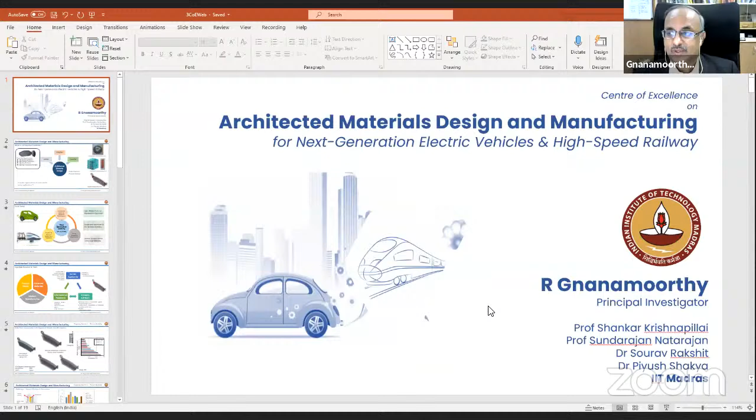I'll give a brief about the research activities happening in this Center of Excellence on Architected Materials Design and Manufacturing, with a target towards next generation electric vehicles and high-speed railway.

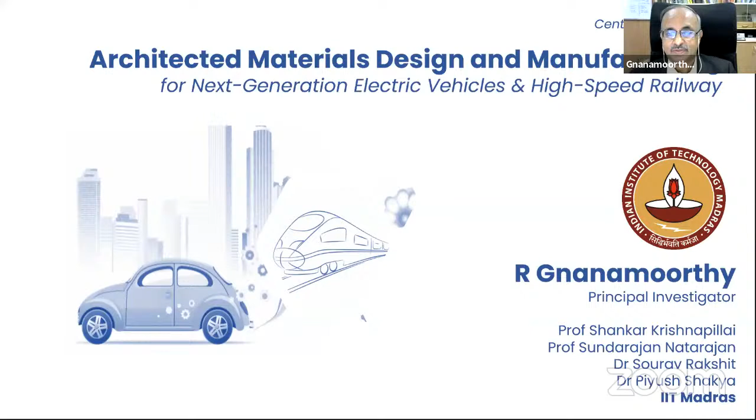Myself, Gnanamoorthy, is the principal investigator, and we have Professor Shankar Krishnapillai, Professor Sundarajan Natarajan, Dr. Sourav Rakshit, Dr. Piyush Shakya, all colleagues of mine working in the machine design section of IIT Madras.

I'll give a very short brief about what architected materials is, because the terminology may be new for some of you. I'll start with a simple example, a well-known application: a brake pad. Most of you might be very familiar with this.

If you look into the requirements for this product, it's very complicated, not like other products. The material should have a very good coefficient of friction, very high thermal conductivity, very good wear resistance, and very good high temperature strength.

If you look into these requirements, it's impossible to have one single material which satisfies all of them. Some materials have very good friction coefficient, but the same material may not have good high temperature strength. So what's done so far is to use different proprietary combinations developed by leading industries. Some combinations are excellent for road, and some are very good for rail applications.

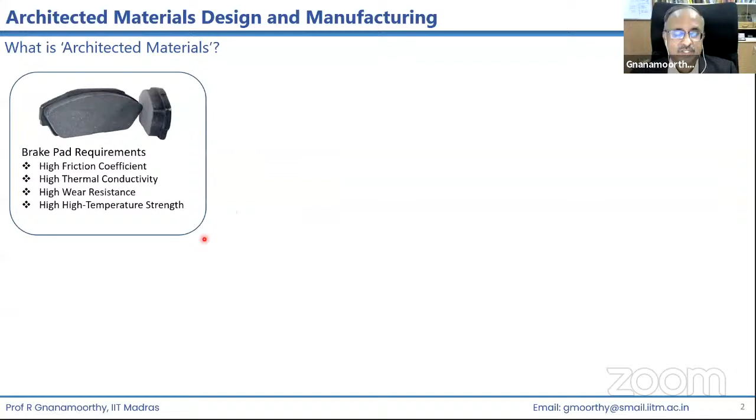And it is always a composite, needless to say. We have metal matrix composite based brake pads, ceramic composite based brake pads, and polymer matrix composite based brake pads also - all composites. We mix nearly 10 to 15 ingredients to meet these requirements, and it is homogeneously distributed in the material. In this architected material approach, we should not get confused with composites, which we are very widely using.

Here we try to selectively reinforce for the requirements expected in an application, because metal has its own capabilities - easy to deform, can absorb a lot of energy, a good thermal conductor. Polymers are light in weight with good friction capabilities. Ceramics have excellent high temperature strength. All these are entirely different classes of materials.

Most of you are engineers and very familiar that the processing capabilities and functional requirements of all these materials are entirely different. Now we are trying to see how best we can bring these different materials together at a macro level in a product, so that the best properties of each are effectively utilized in the component.

We are not getting into composites - we are getting into macro reinforcements, selectively placed in the product depending upon its requirements, so that we get the best of everything in a single product. This is the area we started working in around 2006 onwards.

Most of you know the functional requirements needed at the tooth are quite different from what's needed in the hub region. We need a high strength material in the load transmission portions, but not that much is needed when we want to achieve the required dimensions.

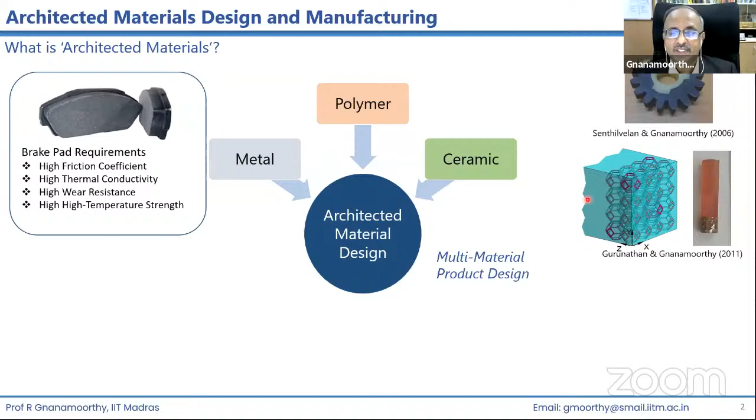So we started investigating using the injection molding process to develop very different types of materials in a single product. Then subsequently, we started research into network-based composites, where we take a metal foam and fill it with a suitable resin depending upon the functional requirements, then try to understand how these composites behave under certain functional requirements.

And in this example, as I mentioned, we also did research work on brake pad performance. We've done a lot of numerical studies to effectively reinforce with different classes of material for certain functions, which I will brief in subsequent slides.

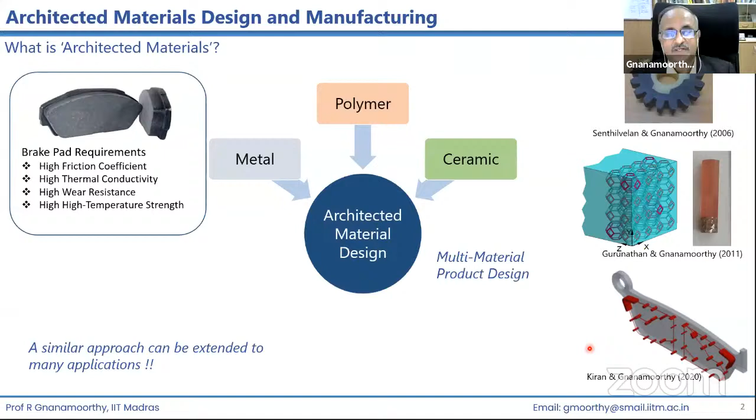Okay, so the architected material approach is macro reinforcement to get the selective properties in the selective region. Although I have just shown certain examples here, this can be applied to any applications, depending upon the functional requirement, depending upon the need of the material to satisfy the overall performance in a certain period of the life cycle of this component.

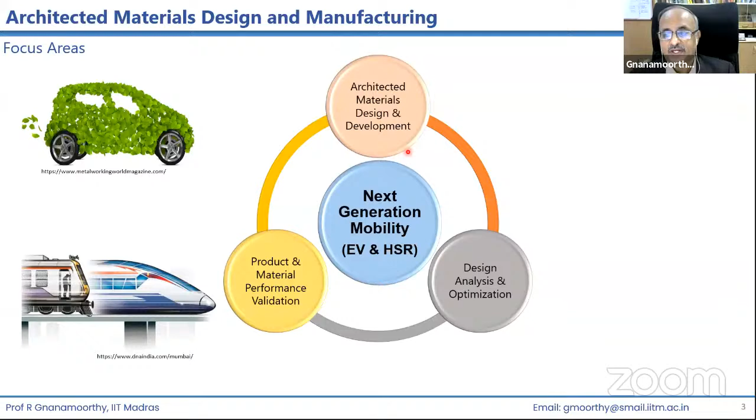We need to do these reinforcements accordingly. What we focus on in our group is architected materials design and development as one key area. We need to understand what kind of products require what kind of functional requirements as an individual product. Our team members are very good with numerical tools and design optimization to properly select the reinforcements to do the effective function.

And we also look into developing some simulated products. Sometimes it will be difficult to develop a very big size product and do the validation, so we like to do it in academia, whatever way is possible. Although this can be applied to multiple domains, now we like to focus on two critical areas which are of importance for Indian society.

Electric cars and then the high-speed rail. And our focus also is on making the components lightweight. In the mobility sector, whatever you want to improve, lightweight is always the first requirement.

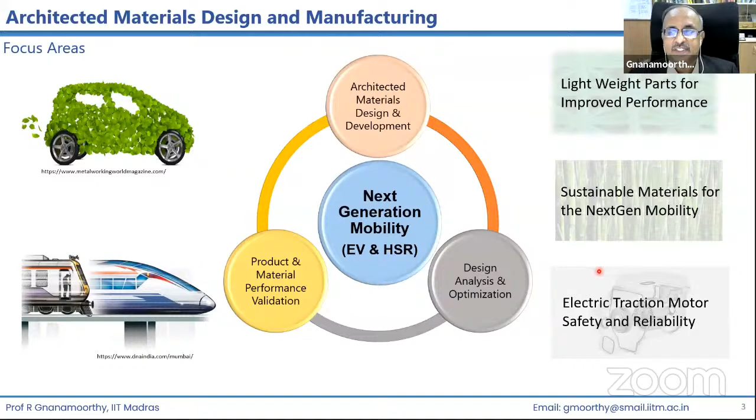And then sustainability. It's going to be very important for the automotive sector because we need to reduce the carbon footprint, and how to use natural materials in the next generation mobility. We also try to investigate some specific issues associated with electric vehicle traction motors, which is a key component in these applications.

So what is needed to pursue research in this domain? It is translation research, as most of you can understand. We need to have good knowledge of the product design. We need to understand how the brake pad is designed, or how every component is designed. A sound mechanical engineering knowledge is needed.

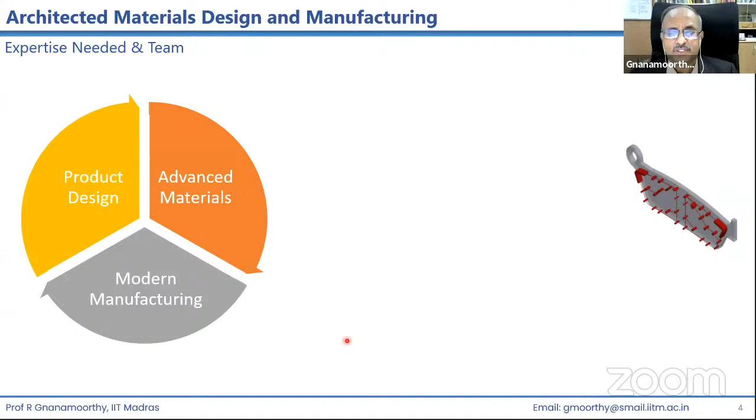Then accordingly, we need to have the selection of materials. Now it is a choice of thousands of materials available, and we need to select the best ones. Then good information about the manufacturability of the materials is needed. So to carry out research in this domain, we need experts who are good in design with equally good knowledge in materials and manufacturing.

Otherwise, a real product will not come out. So the current members, as you can see on the website, we have experts in these domains: design optimization, numerical analysis, and reliability studies. We collaborate with our colleagues who are close to Chennai.

Then the international associations currently involved are with the Nagaoka University of Technology and Kindai University, which is ongoing, and we are open for many more international collaborations and reputed collaborations within India too. And needless to say, this requires a lot of expertise and experts like our moderator and others.

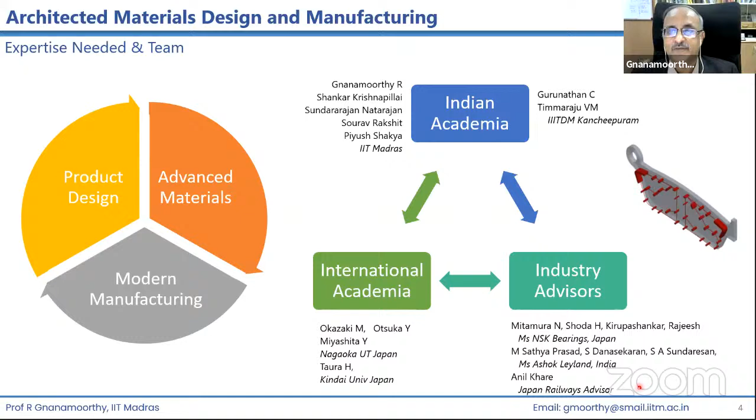Experiences are extremely important, so we have good association with NSK Bearings Japan. They give their practical problems, what kind of solutions are needed, what are challenging kinds of things, and advice from Dr. Sathya Prasad and his team. Then an associate from Japan Railways, a consultant, is also helping us identify certain components which the team will look into as part of the research.

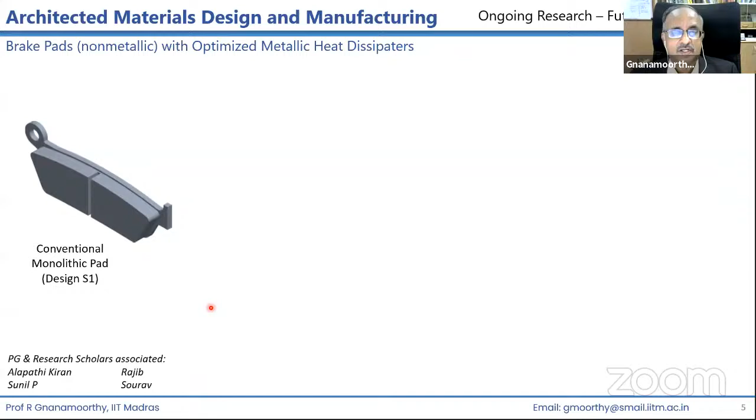I'll just brief about some of the ongoing research activities to give a glimpse about what is happening here. This work is done by some of the postgraduate and PhD scholars, who are acknowledged here. And this is a conventional brake pad. I think most of you are familiar. We just do, in one slide I am briefing, plenty of work is done, and you can see some of them are already published.

We try to look into one important aspect of how best we can dissipate the heat. Now the demands are very high. We always want to fly fast, we want to run, drive fast. So the brake has to absorb a lot of energy, and it has to dissipate it.

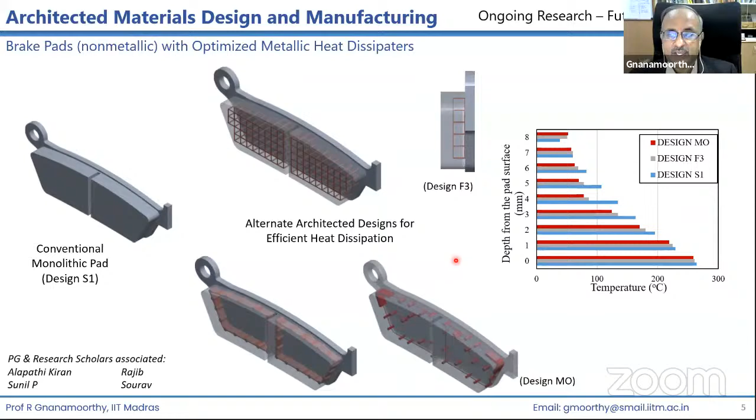And we don't want to change the brake pads every 2-3 years. We want to have it as long as possible. So one of the critical elements, we try to look into different possibilities of having metallic heat dissipation units, did some numerical simulations and arrived at places where heat is going to get generated, modeled it, optimized it, and then we try to understand it using numerical tools and optimization tools, and find out the best metal insert which will not influence my friction characteristics.

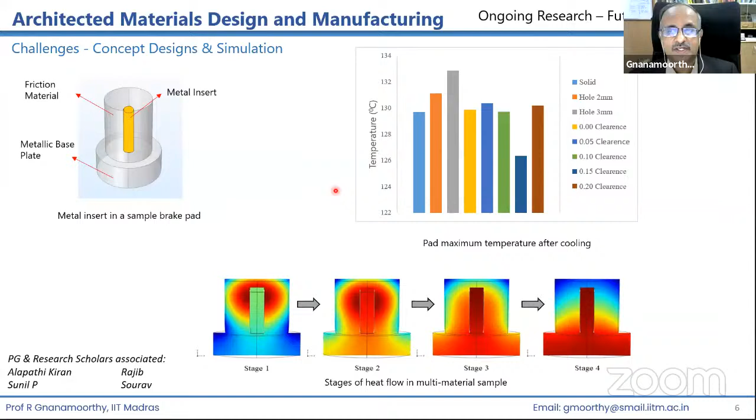Another area which is ongoing and close to this topic is traction motor bearings in electric vehicles, and also in high-speed railways. Probably some of you may think why I am choosing these two domains. Both are run by different types of electric motors, so that is the reason I have given this topic.

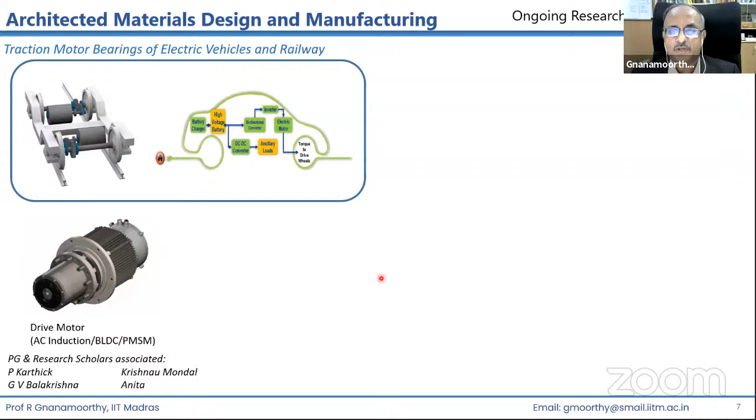Future mobility means we need lightweight structures, and in this new sector our drive is going to be mostly some type of drive motor, depending upon the brand. They have different types, and one of the critical elements in the drive motor is the bearings. If the bearing is damaged, it creates a lot of noise sometimes, and the vehicle itself will not move. So one of the critical elements is the bearings.

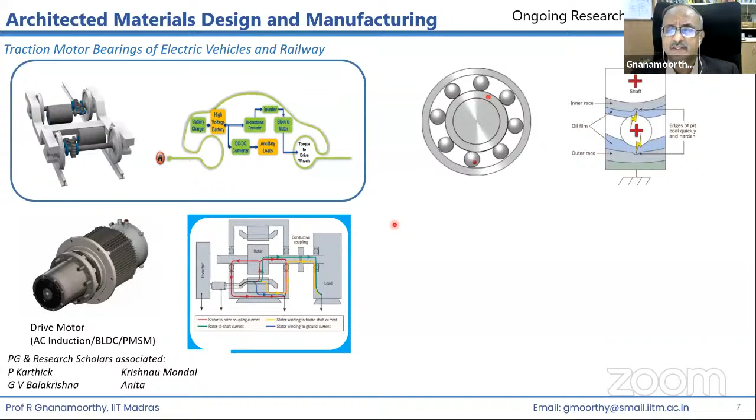We have a lot of bearings in conventional IC engine driven automotives also. But if you look into that, the sound generated and noise levels in other parts are very high, so the bearing noise becomes negligible. But when it comes to electric vehicles, we know that IC engines are not there, and any small sound generated from very minute damage in the bearing becomes noticeable.

So now our group is also trying to understand when current flows in the bearing, what is going to happen, what will happen to the reliability, damages, and subsequently the noise generated. We try to understand the contact characteristics, because the bearing is a very critical element. It has all kinds of motions, including contact fatigue.

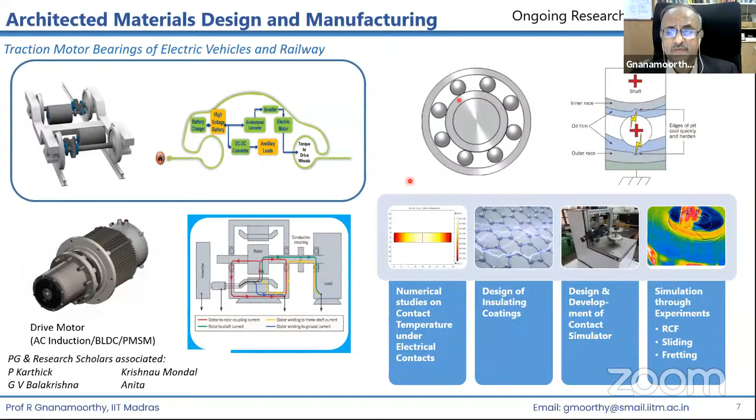There is simple sliding in some parts, fretting in some parts, and all kinds of relative motion taking place. It runs at very high speeds, and it is a critical element—if the bearing fails, the whole vehicle is down. So now we try to understand the reliability of these bearing materials under combined mechanical and electrical loads, which is expected in the drive motor.

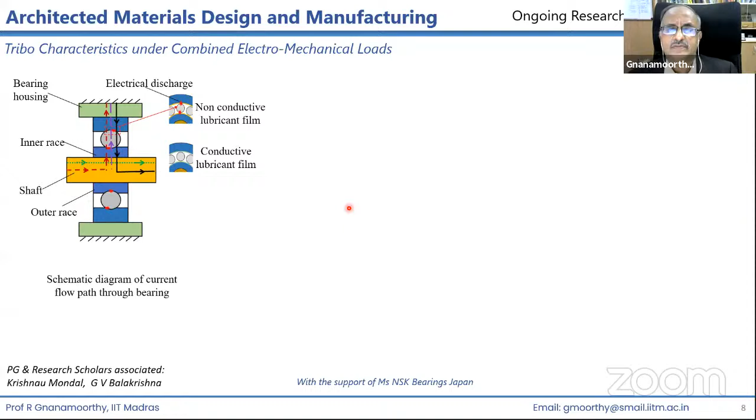As I mentioned, different types of current flow depending upon the drive motor and its control units, and the most critical thing is the lubricant in the bearing. This can get damaged, or it will not perform its intended function. So we'd like to understand—not the complete bearing, of course—what is going to happen in these kinds of contacts under combined electromechanical load.

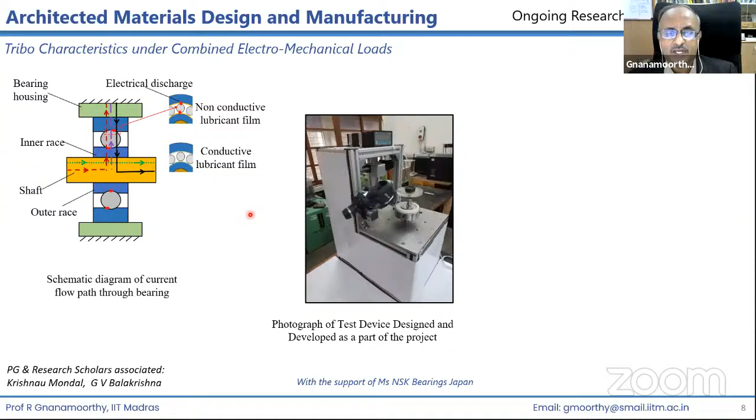This is part of the work of one of my MS research scholars, who has studied different electrical loads, and you could understand even in a very short time—this is not complete bearing testing, it is a simulated condition under the worst operating conditions—that the coefficient of friction increases even in a very short duration of about 1,000 meters or so.

Now imagine using these bearings for many years and thousands of kilometers—you can anticipate how fast you can expect failures, if it were pure sliding, but it's not going to be that. This research is being done under accelerated conditions.

The contact temperature rise in a very short duration is significantly high, and this results in damage to the lubricant—the lubricant will lose its function. A lot of research is being done in leading industries on developing different material combinations that will withstand this electromechanical loading, and lubricant research is also being done to create lubricants that will survive for a longer duration.

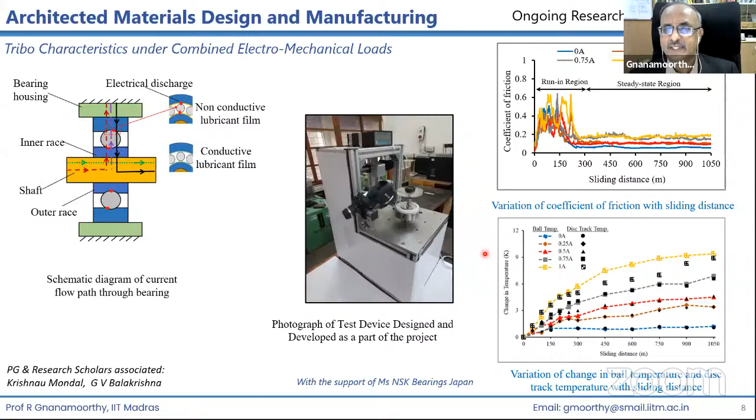One way to prevent this is through multiple attempts, done by electrical engineers, mechanical engineers and other sets of people, to make sure current is not flowing through these bearings. One attempt is to give a coating, which is also attempted by leading bearing manufacturers.

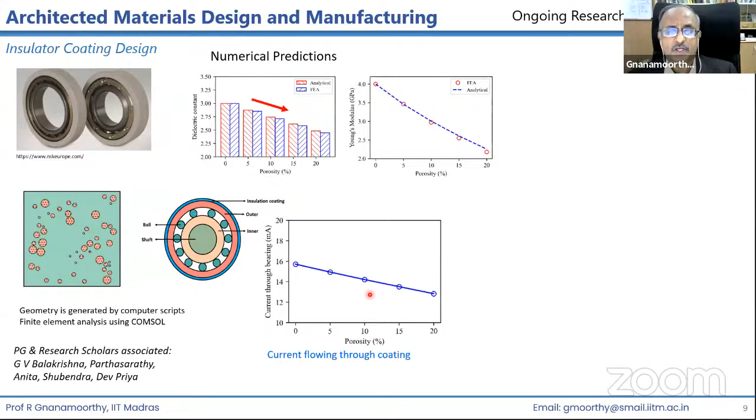We try to understand this numerically right now, and then develop something in due course — what are all the parameters which will influence the insulation characteristics of the bearing.

So now we try to model with different kinds of combinations — is it a pure numerical solution? Then try to understand what kind of porosity levels will be much better, both from the insulation requirements and also from the mechanical strength. It is not only the insulation requirement; mechanical strength is extremely important.

We did a lot of numerical work on different levels of modeling different pores, trying to understand how these things influence the coating made with different porosity gradients, or how we can make it with different kinds of architected coatings to ensure the multiple requirements of electrical insulation and mechanical reliability are achieved. This is the type of work we are also doing in this center of excellence.

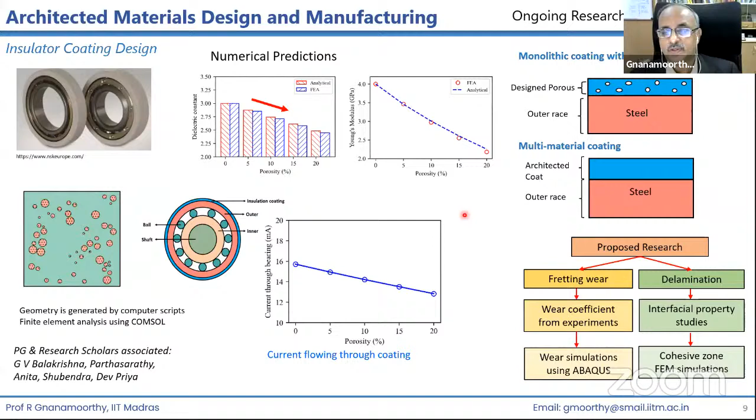So we wish to study the different contact characteristics expected here under sliding, rolling-sliding, and in the case of fretting — trying to understand both numerically and experimentally what type of coatings will be preferred for these applications.

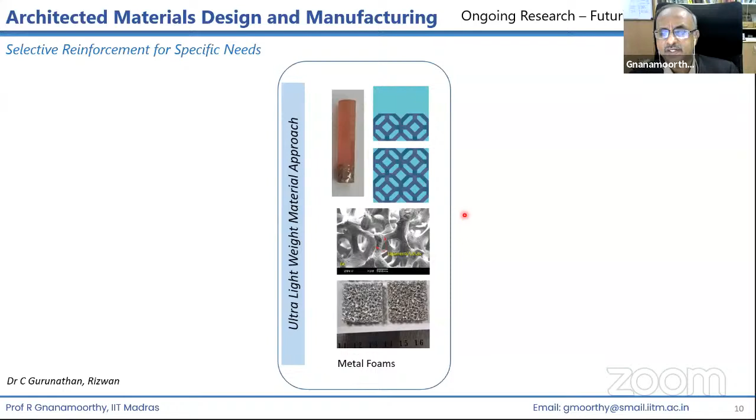This is another topic — selective reinforcement is the terminology we use here. One of our scholars has completed a doctorate in this domain. So the focus is on how to effectively and selectively reinforce to cater to certain requirements.

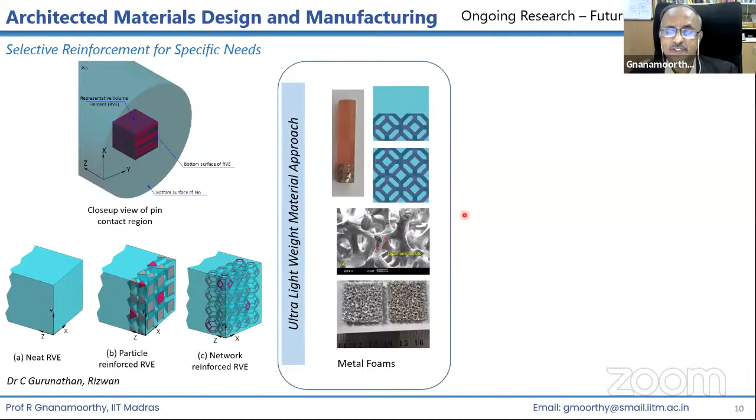We try to study how these metallic foams, when reinforced in certain places wherever you want to dissipate heat, perform best. We did both experimental and numerical work, and observed that significant heat dissipation happens when you reinforce it with a metallic foam compared with particle reinforcement.

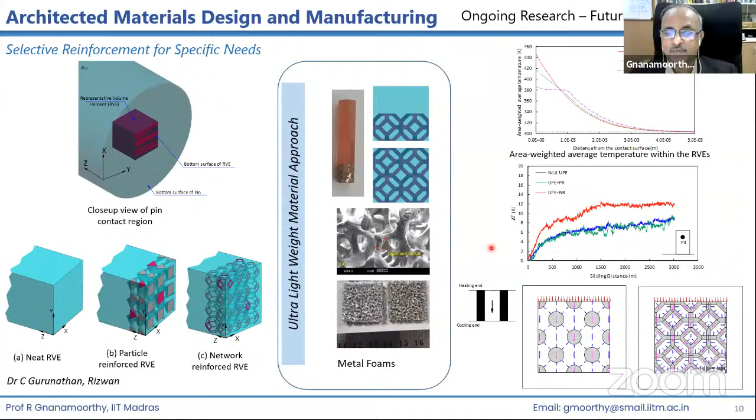This is a type of work from this aspect. Of course, we can do this kind of reinforcement for different functional requirements so that the best of the class of materials is achieved.

We are also working on hydrogen cars — it is a proton exchange membrane fuel cell, PEMFC. In this case, we are mostly looking into the mechanical aspects; we are not working on the chemical and other aspects.

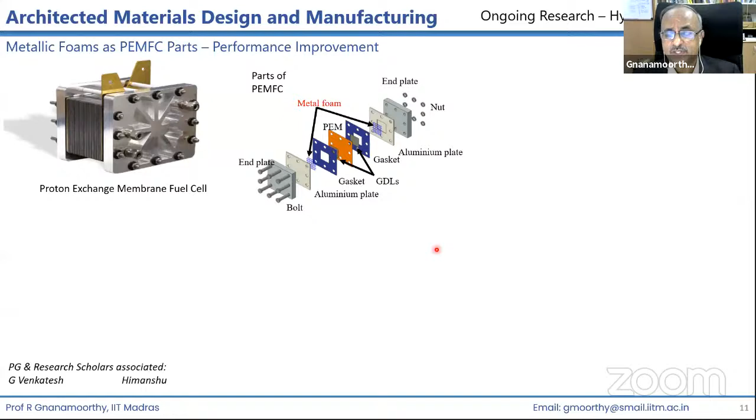Once the component is made and put into service, what is going to happen? What happens if it runs for a few years — will the intended functions be lost or not? One of the key components here are shown, and these components are normally made with graphite plates.

Now we are trying to look into alternatives to graphite plates, and a group of people are working with different kinds of metallic foams. It's an active area of research with a lot of work being done by various groups.

We try to understand if a metallic foam is used — this is nickel metallic foam — in the fuel cell, how long it will do its job. So we do some numerical studies to understand what kind of relative motions are going to happen due to vehicular vibrations.

Imagine you are not always riding on smooth roads — there will be ups and downs. With these things, what is going to happen to reliability? So we model these foams numerically and try to understand what kind of relative displacement is going to happen between the foams and the other materials.

Just imagine if these things run for a few years, you're going to have a problem with the performance of the associated components. So we try to simulate the contacts using simulated experiments — micro contact simulators — to find out what kind of debris are going to get generated, the approximate size of the debris, how it's going to contaminate, and how this contamination is going to influence the performance of the fuel cell.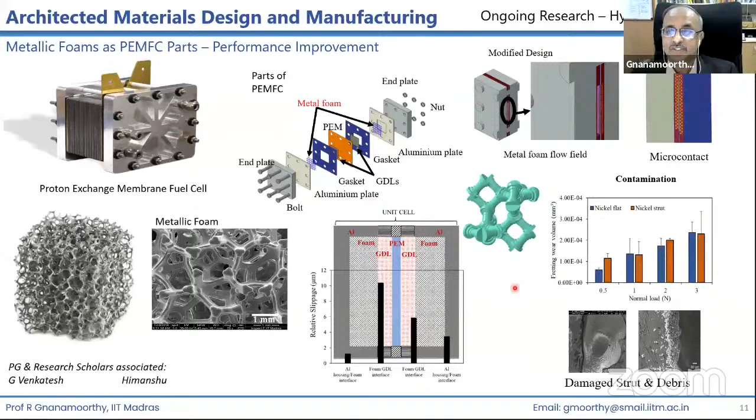A few research scholars are working to find out how this metallic foam changes its characteristics with the clamping load and operational characteristics, and how it can be modified by selectively redesigning the foam so that you get the best result after clamping and during service. This is research work in progress, and now sustainability is a very important aspect.

The whole world is looking for alternative materials which are decomposable and environmentally friendly. So instead of looking into synthetic materials and polymers, why don't we try to look into natural materials?

In South India, there is plenty of coconut usage, and tons of material are disposed of as waste, mostly going into landfills. It forms huge hills in certain parts of Tamil Nadu, and also in Sri Lanka. From these shells, which are currently not well utilized, we get two important byproducts from this waste: one is fiber, another is pith.

So how effectively can we convert these natural materials? Plenty of research is done on natural fibers like jute, banana, sisal and bamboo for developing polymer composites with synthetic resins, and people have studied their performance.

But we are trying to look into product-centric translational research—how best we can use our architected design compass concept in product development, and then use natural materials so that sustainability is achieved.

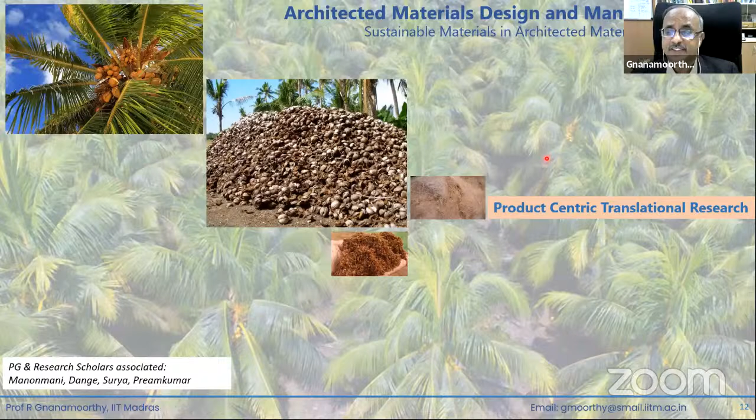We are looking for applications in these domains because this is one of the important areas where significant CO2 emission is still happening, and this research is focused towards that. Right now, only limited research is done in automotive, and we would like to collaborate with leading automakers so we can focus on development of their products.

Our association is strong with these 4 universities currently. We have decades of experience collaborating with Nagaoka University of Technology, with joint supervisions, joint student exchange programs, and other activities very actively going on for the last 2-3 decades.

Now, with more possibilities of collaboration, we would like to enhance it with Nagaoka University and different universities all over the world. We are also getting associated with Kindai University, and then IIIT Kancheepuram. We get a lot of advice and support from automakers.

One is NSK Bearings, and then the group of researchers from Ashok Leyland—they try to advise us on what direction we should take. We are also interested, and soon we'll have more collaboration with people from the National Taiwan Ocean University and others.

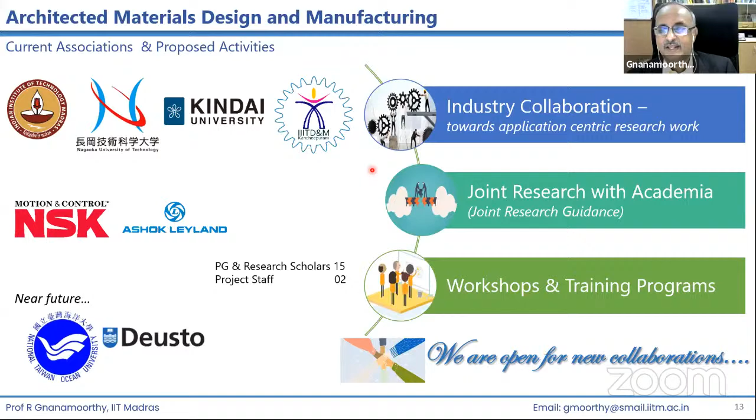Currently, more than 15 research scholars and postgraduate scholars are associated in different activities. I have just shown certain things in 1 or 2 slides, but each area is discussed for hours. We also have 2-3 staff members working on this topic, so this is the core team—we have Dr.

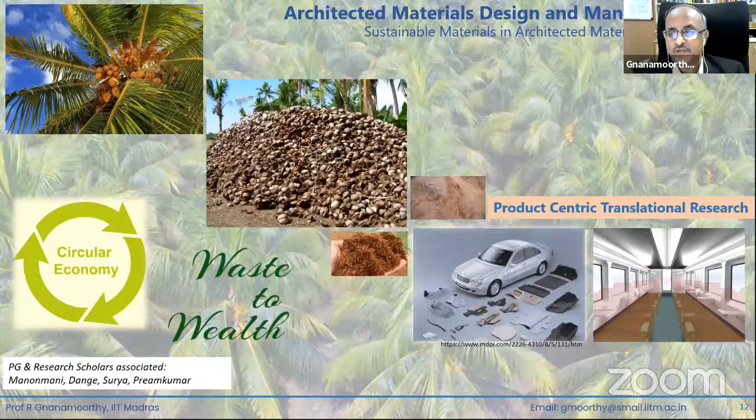Yeah, see, if you look into the very popular type of fuel cell which is used in automotive, it is a PEM fuel cell. We have many critical components in the PEM fuel cell, and each plate is going to be in terms of 1 or 2 millimeters. One of the critical elements which I have not shown here is your graphite plate, which is very widely used nowadays - it's a bipolar plate, which is one of the critical elements. We know it is made of graphite. The problem is graphite is excellent for this application, but unfortunately mechanical reliability and fabrication cost is quite high.

So our interest is to look into these PEM fuel cells, because this is the one which is most popular for the transportation application. There are many different types of fuel cells too, and we are more interested in looking into one particular part which is critical and looks for an alternative - the graphite plate. I have removed the picture of the graphite plate, but if you look into that, it will have some sort of different geometries of grooves put into the graphite plate, weighing around 3-4 millimeters thickness. It depends upon the brand and other things.

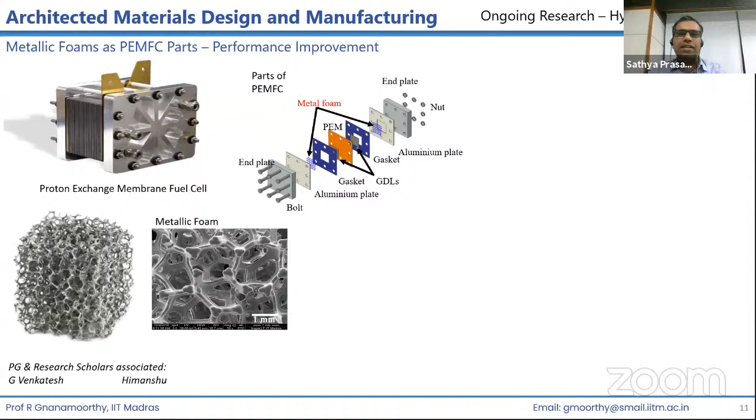Thanks so much, Professor. We have a couple of questions, but only 3 more minutes left, so I request the panelists to make it quick. The next question is: in future, electric vehicles may rule the world to reduce pollution, but the questioner says, how could we charge the vehicle in a sustainable manner without harming the environment? He says that the electricity generated to charge the vehicle should also be green.

Any views on that? It's much better than your IC engines. You can, one way, simple way - it's only relative.

We need to move, we need transportation, we need the mobility sector. It is much better than IC engines.

Now, in future, we are looking into something much better. So we are looking into hydrogen cars. It is much more cleaner. Needless to say, the size of batteries and number of batteries used is going to be significantly reduced in the case of hydrogen cars compared to the conventional electric vehicle. So there is plenty of savings.

Solve one problem at a time. Good motors, good batteries, and then we'll think about good electricity also.

Which brings us to the last question. Is it possible that in the same way biodegradable materials like coconut and sisal and jute are used, other waste that pose a serious threat to environment like e-waste or different plastics can be effectively recycled? The question is what about current materials like e-waste and plastics and all that? That is a different, entirely different domain.